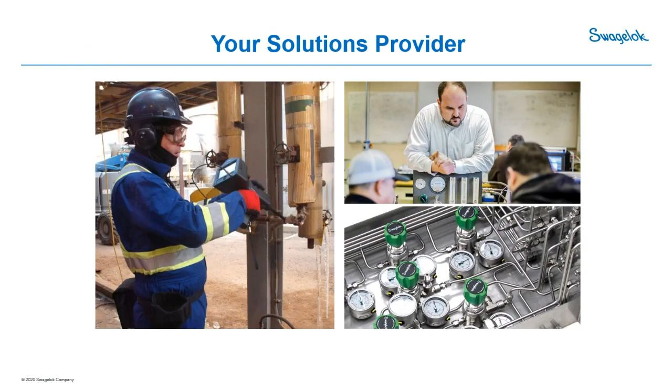Thanks, Tim. So like Tim said, my name is Phil Daniels. I'm a Mechanical Solutions Engineer for the team here at Swagelok Central Ontario, Atlantic Canada. I'm a professional engineer in Ontario, and a bit about my background: I have a Bachelor of Science in Mechanical Engineering with a focus on thermal fluids. I've been with the Swagelok organization for about 6 years now, and really my focus is on technical support, so hose advisory service, pressure regulator selection, includes high pressure systems as well as seal support system configuration.

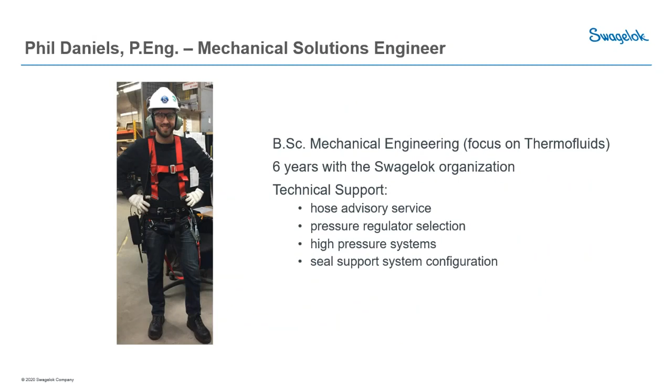But today we're going to focus on tube versus pipe. Today we're going to have Hassan Ghoul, an associate solutions engineer with our group here. A bit of Hassan's background: he has a Bachelor of Engineering Mechanical, and he's been with the Swagelok organization for about 2 years, again with a focus on technical support. This includes fluid mechanics, valve selection, regulator essentials, as well as seal support systems. Hassan will be in the wings to address any questions that you have as we go along here.

Now, like Tim mentioned, the focus of today will be on tube versus pipe. This will include advantages of tube, touch on some thread issues, and then go into some more details on flow, erosion, corrosion in different types of systems. We'll touch on material quality as well as the overall cost when approaching projects.

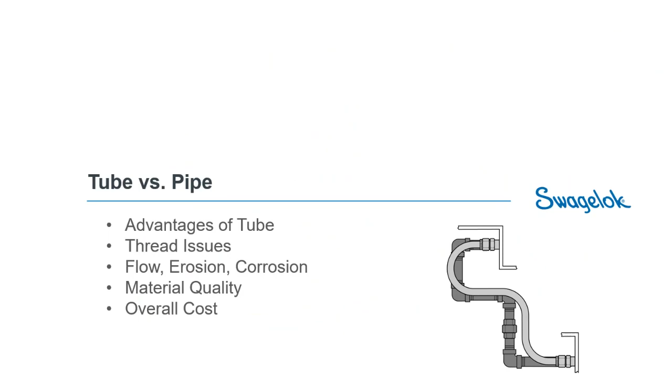Now, jumping in just on an introduction to the Swagelok tube fitting. For those that aren't familiar or haven't worked with it too much, just a bit about how the tube fitting works. It's made up of 4 main components: the nut, the back ferrule, the front ferrule, and the fitting body that you see there. The colors are yellow just to show a highlight on the 4 different components.

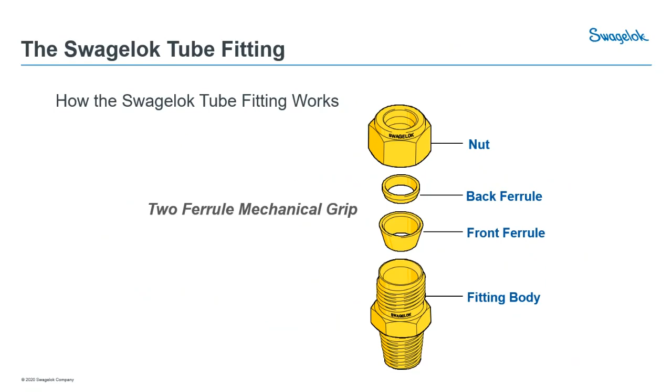On a very basic level, some things to highlight are that there's no special tools required, and there's no rotary motion. All that's required is 1 1/4 turns from finger tight. This is key because the tubing remains perfectly still—there's no rotary motion, and all that's required is the 1 1/4 turn.

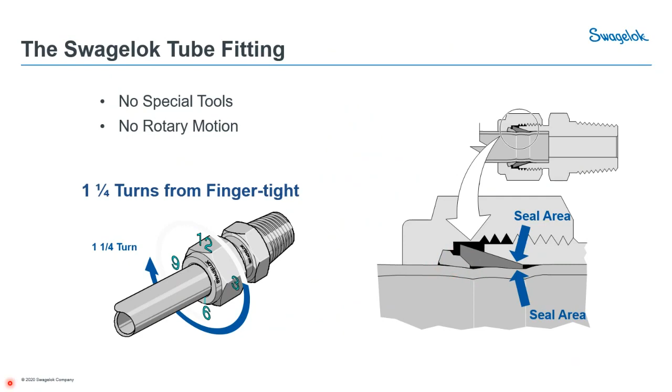Now, if you look at the fitting here, we see a section view. This is on the front ferrule, the longer one, as well as the back ferrule. So really what's being achieved is a long, tight seal area on the front ferrule, and the back ferrule is doing a lot of the work of the gripping as well as the vibration resistance. Now we'll show a short video here just highlighting the simple installation procedure for a tubing system.

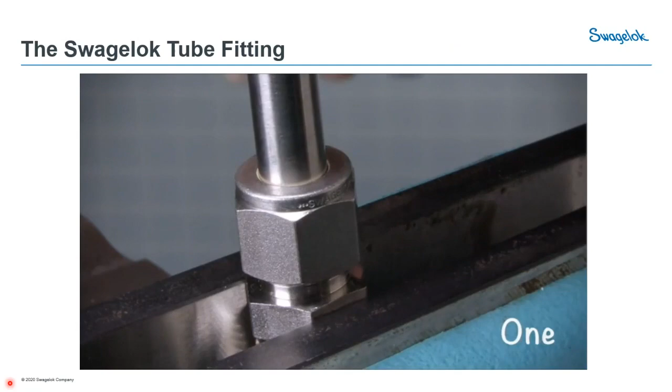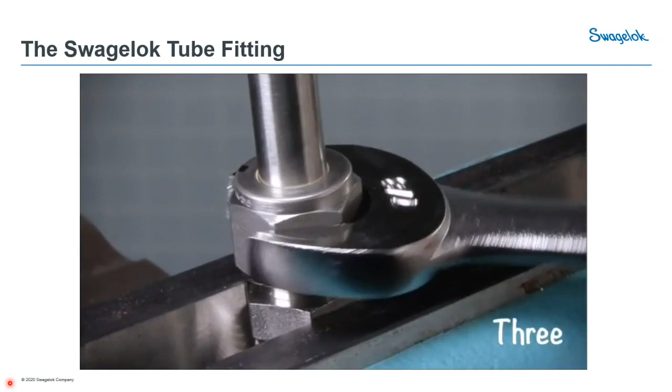Step one is to insert the tubing up against the shoulder of the fitting and ensure the nut is finger tight. Step two, typically we'll mark the nut at the 6 o'clock position. Then as we tighten with a wrench, we'll do 1 1/4 turns, which will end up at the 9 o'clock position. That's it, the job's all done, there's nothing more to it.

So simply when you're looking at the tube fitting, it's a 2-ferrule mechanical grip Swagelok tube fitting. A key thing we'll touch on later is the vibration resistance you get from this. There's no special tools - as you saw in the last video, all you need is a simple wrench to tighten the tube fitting, and there's no additional preparation. So no threading, no taping of threads, no flaring of the tubing, and of course no soldering, brazing, or welding of the system.

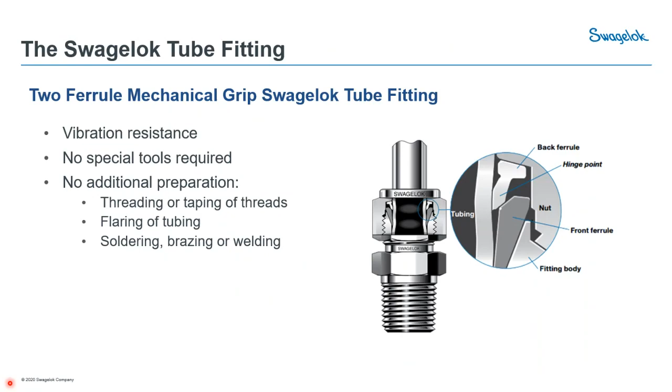Now when we dive into tube fittings, typically you'll look at the tube pressure ratings. A tube fitting is rated to the working pressure of the tubing it's used with. So let's go through an example of the published table. Let's say we have a 1/2-inch system, and let's say you have a 3000 psi system. What you might select is a wall thickness of 0.049. This would result in a working pressure of 3700 psi. There would be a 4-to-1 safety factor on top of this, but the actual working pressure would be 3700 psi in this case.

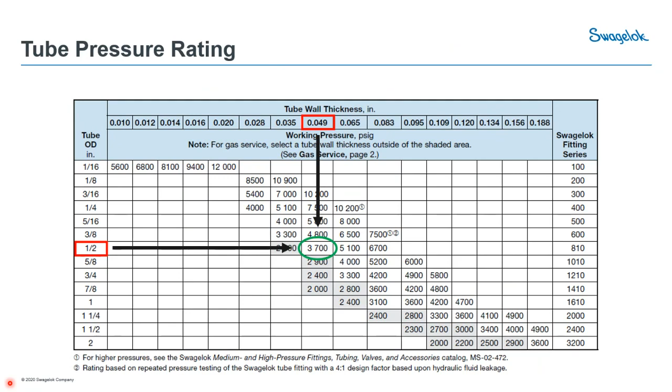Now you'll also notice that there are some shaded cells. There's a few here that are an actual shaded region where the rest are white. If we're looking at a gas application, that's where this becomes something we need to look at.

So let's say, for example, we have 150 psig for an air system. Again, let's focus on 1/2-inch. Now you're thinking 150 psi, you're probably going to be fine with 0.035 wall. That would have a working pressure of about 2600 psi. But what's really required for a gas system is that because gases are small molecules, they can easily get through leak paths in a system compared to a liquid. So what we actually need to do is jump up to that next wall thickness.

And this is outside of the shaded region. The reason for this is that gas systems require that thicker tubing because it creates more resistance to the ferrule and really results in a longer, tighter seal, so you can ensure there's a gas tight seal for your system.

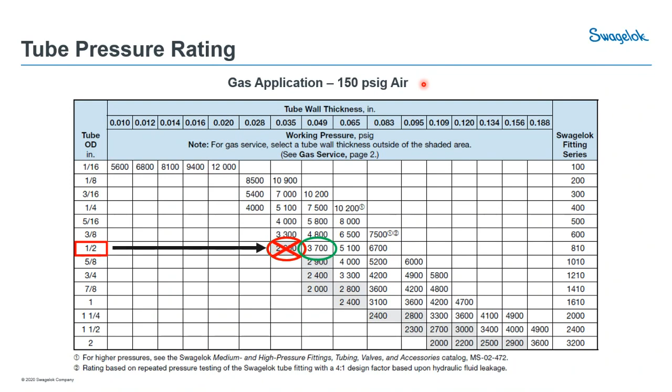Now again, one of the main advantages of tube versus pipe is ease of installation. All that's required are standard wrenches and the job's all done.

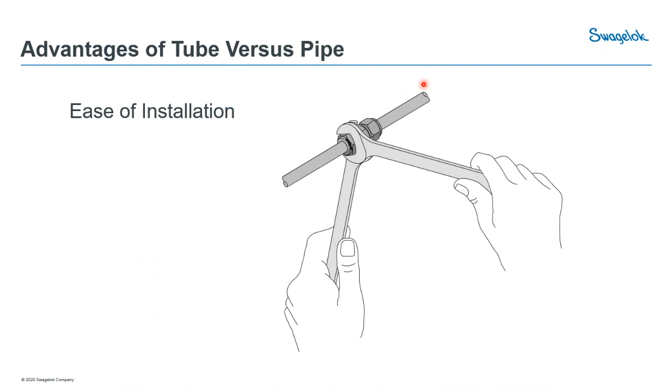Now when we look side by side and touch on some of the advantages of tube versus pipe, one of the primary things to highlight is better strength to weight ratio. When we're looking at a threaded system, typically you'd be looking at maybe schedule 40 or schedule 80 piping - that's really where the strength to weight ratio is a big difference. But when you look at why you have that extra weight, often people think, well, piping is stronger, it must have a higher pressure rating, it's rigid, it's tough, it's robust. But really, tubing from a pressure rating standpoint is equal, if not better, especially on the strength to weight.

So the entire wall thickness of the tube actually contains system pressure. Whereas with a pipe, the reason you have that thickness is primarily so you can cut threads. You have all this extra material just so you can cut the threads. But when you're looking at the working pressure of the system, it's really defined by the thinnest point in the pipe, and that would be the front of the first thread. Now, obviously, if you're looking at welded systems, you may have some thinner wall on schedule 10 or similar sizes, but we'll touch on some welded systems later on.

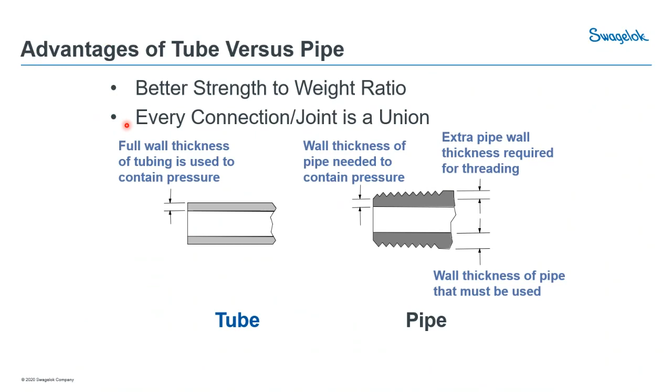Additionally, every connection or every joint is a union - we'll touch on some examples later on. So really, another advantage is fewer connections are required. When you have tubing, you don't have the need to use elbows or introduce additional connections, and each connection is a potential leak point. So when we look at tubing, you have the ability to bend and have that sweeping bend, and you avoid any fittings in this example.

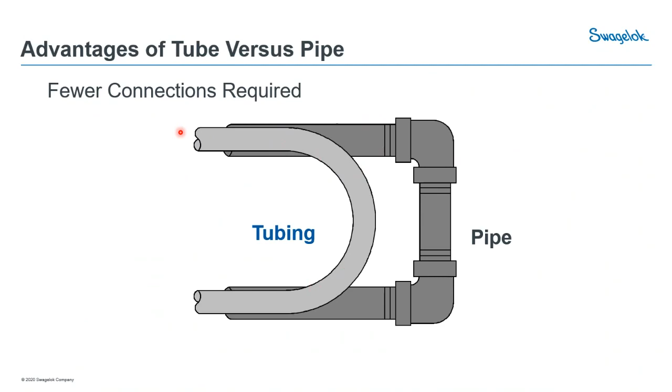Additionally, you're looking at a lower pressure drop. So if you look at this system here, you're having a smoother, more laminar flow, so you have less pressure drops and more flow through your system.

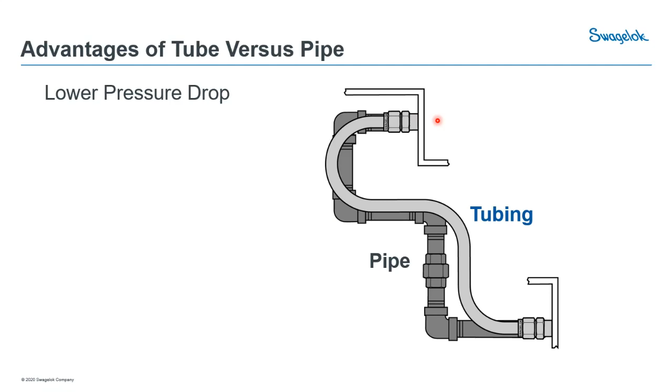Alternatively, you have the sharp corners of the piping system here. And again, looking at the number of fittings or potential leak points, on the tubing system you have one connection here, one here, and one here. So you have about 4 connections on the tubing system. For this piping system, you have a total of 13 connection points. So there's a lot of different things that go into that: leakage, connection points, and even labor that you really save when you're bending in a tubing system.

Now let's take a specific example side by side. If we look at a 1.5 inch pipe versus a Swagelok tube system, in this case it's a higher pressure system, so we're looking at schedule 160 pipe and 2 different sizes of tubing, with wall thicknesses of 0.134 inches and 0.188 inches for the higher pressure system.

So if you look at the wall thickness of the pipe, there's a lot of extra wall thickness - you're at almost 0.3 inches, whereas you're at 0.134 and then 0.188 for the tube wall. Now for pressure ratings, you're close to 3,000 psi for the piping, and you're up to almost 5,000 psi on the heavier wall thickness of the tube.

Now for outside diameter, piping is measured nominally, which means the actual nominal size of 1.5 inches may not be reflected in a dimension on the pipe. So the outside diameter in this case is 1.9 inches. Whereas for tube, it's always a true OD - the outside diameter is always true to the nominal size.

Now if we look at the inside diameters, for the SKED 160 pipe it's about 1.36 inches. The tubing is very similar, at 1.23 and a little bit less on the heavier wall at about 1.12. But here's where it really comes in: when we talk about that strength to weight ratio, you look at the pressure rating around 3,000 psi, and you're getting a weight per foot of almost 5 pounds on the piping. Whereas for the tubing, with pressure ratings of 3,400 and 4,900, you're getting respective weights of about 2 pounds and then about 2.7 pounds.

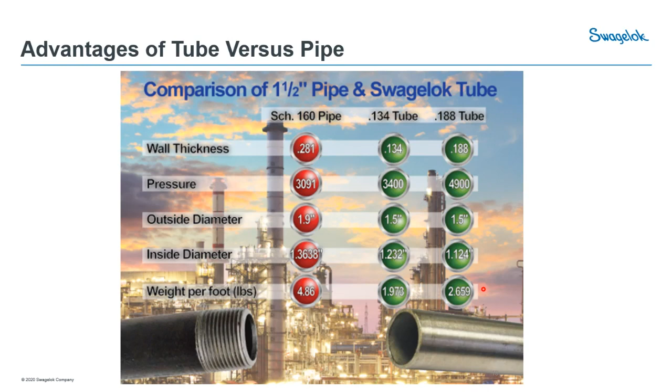Now when we look at the different types, we talked about the tube fitting, and really what goes into the installation, all that's required are simple wrenches. When you look at a threaded system, there's taping of the threads, and when you install a thread, the installation procedure is to install wrench tight. Now there can be variations in that - if I tighten the fitting to you, wrench tight could mean different things. So there's a lot of variations and factors that can come into that.

So there's the threading of the pipe, which we'll touch on, the taping or sealant, as well as the installation. Now further, there's welded options - you can see a socket weld example at the top, and a butt weld example on the bottom. There's a lot more that goes into the welded systems, and we'll touch on that in more detail.

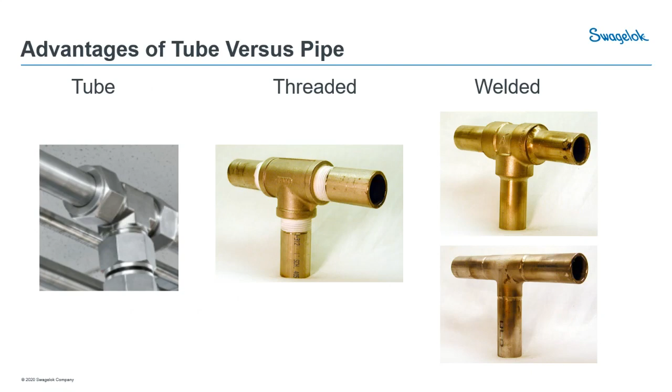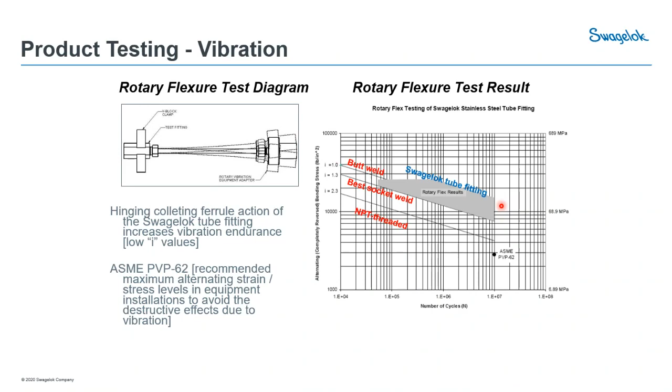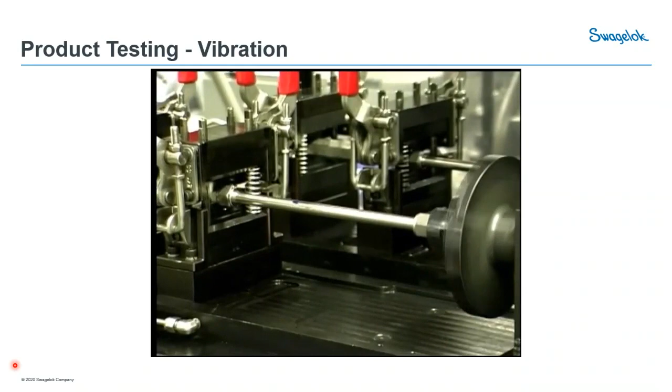Here's an example of what that test looks like. The left side of the tube is fixed, and the right side is attached to a rotating chuck. This is pressurized to 3,000 psi, and it's a rapid test to simulate vibration you might find in the field. This goes over a few days and ends up in millions of cycles of vibration. You can see the tube vibrating back and forth—this is how we analyze how the tube fitting performs under vibration.

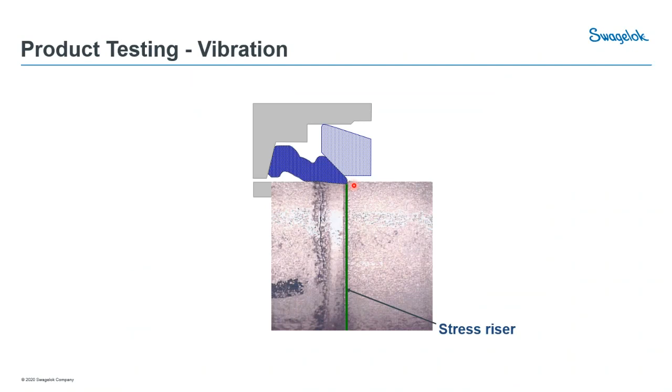But what's really happening when we subject it to millions of cycles and take it to failure—how does it actually fail? If you think about tube fittings, often you'll have a stress riser on the front of the ferrule, with a very small point of contact at the tip, which is where you might expect fracture. But with a Swagelok tube fitting, you actually see fracture further back on the tubing. Why is this? What we've created with the back ferrule is a long region we call the colleting region, where the ferrule is gripping onto the tube. It's really gripping it, especially during vibration, so the force that would normally concentrate on the stress riser is spread across the tubing instead. This allows it to last much longer, especially in vibration service, and that's why you see the resulting tube fracture further along this colleting region.

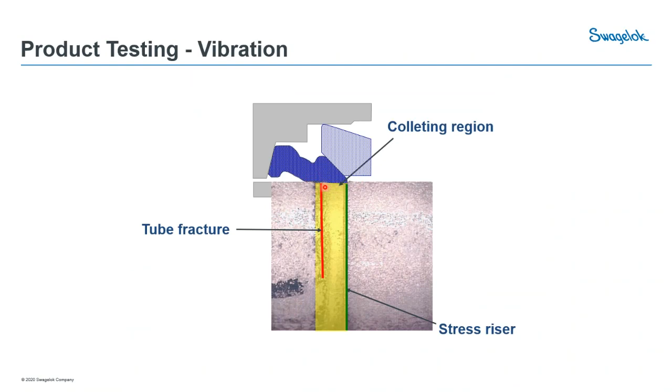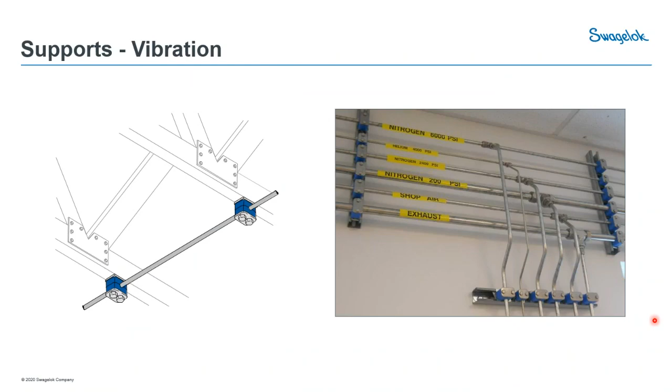Compared to welding specifically, there are a lot of steps you avoid when you go to a tubing system. There are fewer installation steps and less equipment. A big one is the burn permit and fire watch—when you think about installation costs, there are often additional people needed for fire watch, maybe 2 or 3 people just for one fitting or installation. Then there's no X-ray testing on tubing; you avoid purging, passivation, and hazmat disposal. There are a lot of components of a welded system that you can avoid by going to a Swagelok tube fitting.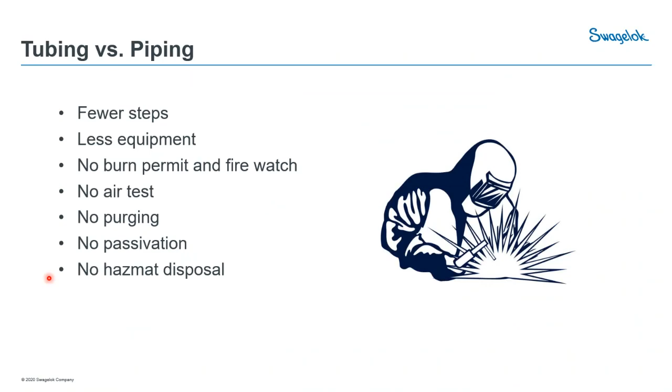There's no hot work, no welding gases, and you avoid weld fumes as well—no shielding needed. On the threaded side of things, there's no cutting oils, fewer metal shavings, which we'll see shortly. And in confined spaces, if we can avoid hot work and welding, all you need are simple tools—no cleanup from oils. It just makes the job a lot simpler and creates simplicity overall, and it's applicable to both ASME B31.1 and B31.3 applications.

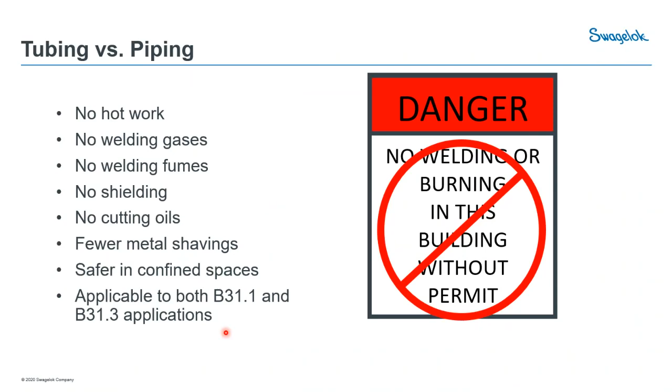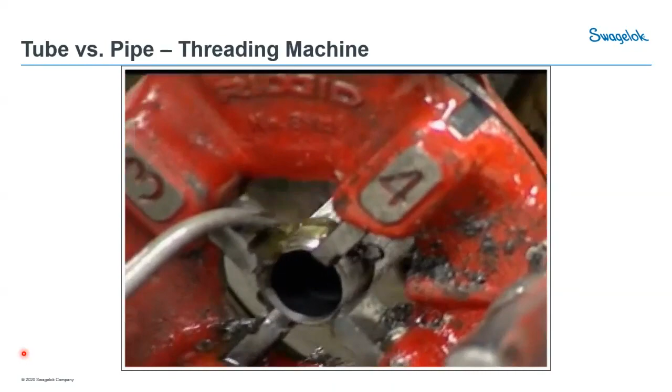Now, if we look at what a typical threading machine looks like, this is really what you're creating: a lot of oil is used, there are shavings, and some oil can get into the pipe itself. It's really about the cleanup of that workspace—you need to account for the cutting oils used and make sure no shavings are left around, especially that none get into the system where they could affect softer components, like a valve seat downstream or a precise instrument.

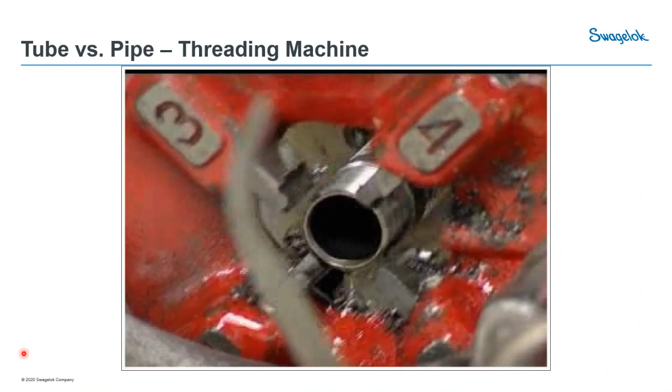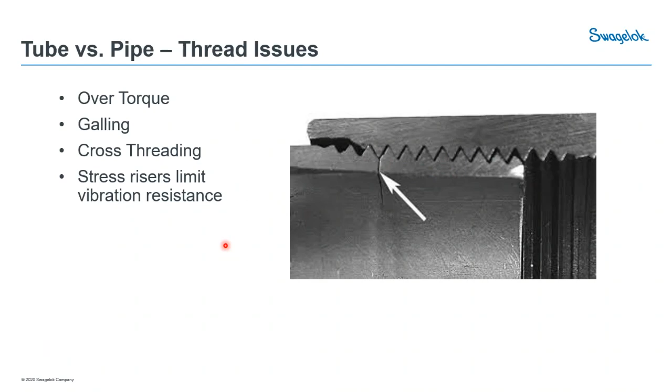Now let's look at a side-by-side example. This one is a condensate booster pump. You can see the traditional piping on the left, which is carbon steel painted piping, and on the right, a stainless steel tubing system. Looking at before versus after, the number of fittings is a big difference: 24 fewer fittings overall, leading to 86 fewer potential leak points on just a small system like this. Part of that is avoiding the use of unions, because every tube fitting can act as a union or joint that can be taken apart for maintenance. You also avoid the cost of additional fitting installation, painting, and everything that comes with that.

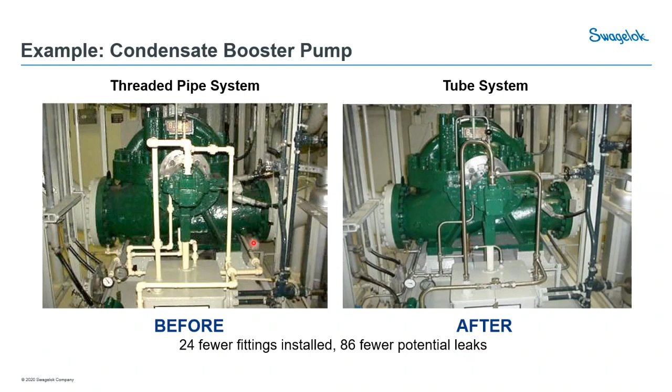Another example here is a pipeline pump, addressing the bearing housing, which is one of the components that often needs to be accessed for maintenance. In the traditional threaded system, anytime the bearing housing needed maintenance, almost all of these fittings would need to be taken apart. That's a lot of work—it would take at least two technicians almost a week just to perform this job. When this was redone in tubing, there are a lot fewer fittings. All that's required to access the bearing housing is to disassemble those two fittings, swing out the tubing, and you can access it as needed.

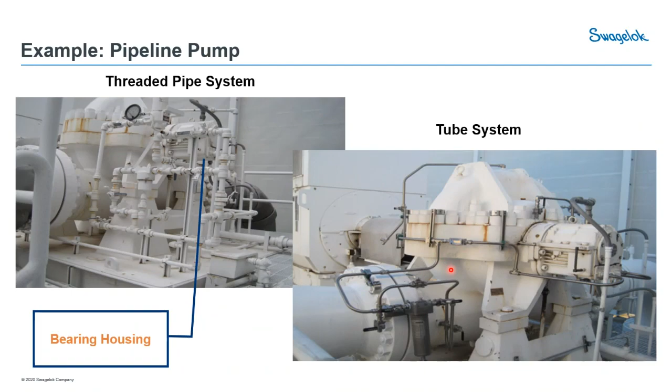Additionally, a change was made. Normally, the threaded piping would be on the side of the pump around the housing. Instead, a lot of the fittings on the tubing system were put closer to the pump, to ensure they vibrated at the same frequencies. When it was beside, you'd have alternating frequencies between the pump and the fittings, causing more severe vibration and leakage issues. Here, we keep them as close to the pump as possible so the frequencies remain similar, resulting in less severe vibration.

So overall, when looking at Swagelok tube and tube fittings, it's an engineered solution. It gives you safety, reliability, and at the end of the day, it's cost effective, especially when you consider the long run.

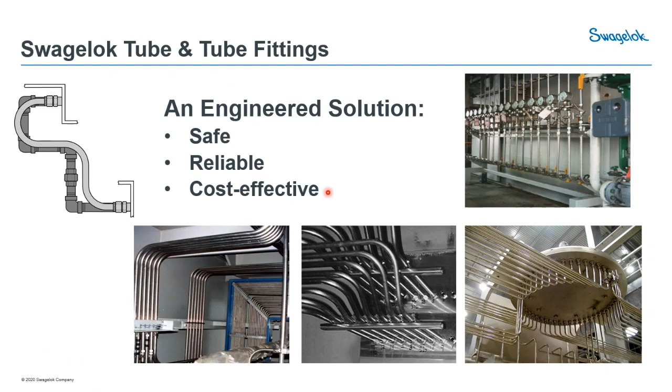Now we're going to pause here for some questions. Hassan, do we have any questions that have come through? Thanks, Phil. Yeah, we have a question from Terry: what size tube fittings do you manufacture? We manufacture tube fittings with imperial sizes of 1/16 to 2 inches, or metric sizes of 2 millimeters to 50 millimeters.

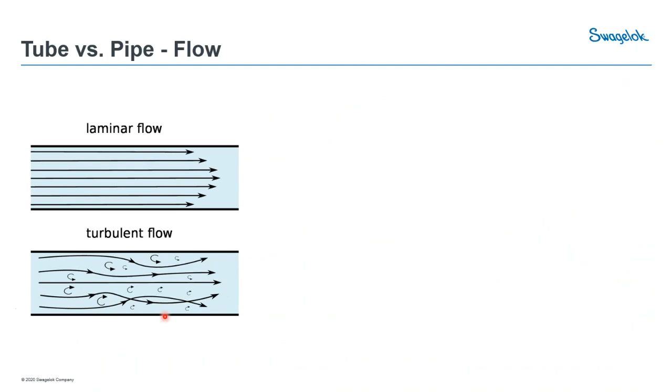That's perfect. Thanks, Hassan. So we're going to move on now into the flow aspect of tube versus pipe. I mentioned when you go to a tubing system, especially with those long sweeping bends, you stick to laminar flow. So what does that mean? When we have laminar flow, it means smooth, sweeping flow—not turbulent, where you have little eddy currents, mixing, and a more mixed type of flow, instead of that smooth flow.

But what does that really mean? If we look at the velocity profile, the actual length of these lines represents the velocity or speed of the fluid. With laminar flow, at the center of the pipe you have much longer lines and achieve a much higher velocity. Whereas with turbulence in the system, you're set to a limit and the velocity can't increase any further. Why does that matter? When you have turbulence, it reduces the velocity, and since velocity is related to flow, you reduce the flow in your system.

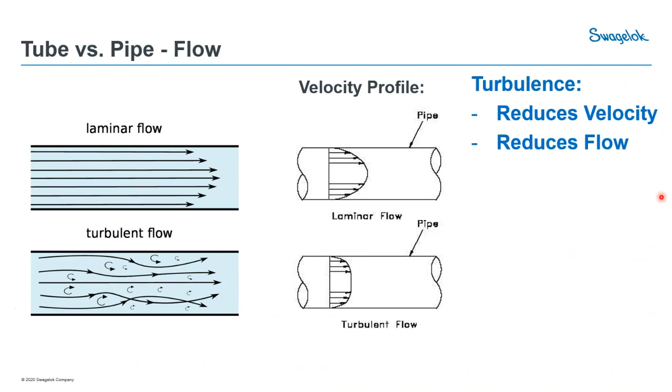Now we're going to talk a bit deeper into the flow side. Bear with me on this slide, and we're going to get to a key point and finding on the next slide. There's something called a Reynolds number, a dimensionless quantity used to help predict flow patterns, such as the transition from laminar to turbulent flow.

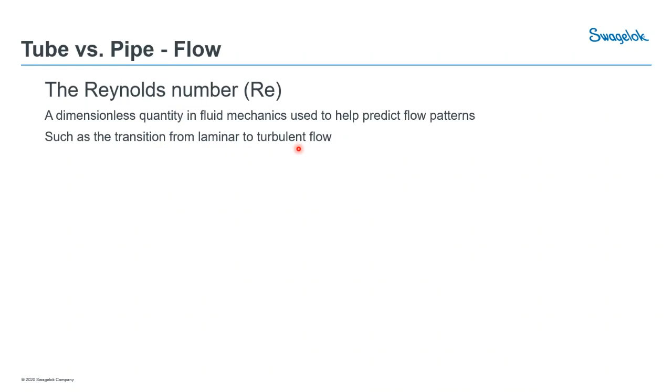Now you could use a variety of formulas. An example here is the Colebrook equation, which we're not going to get into, but there's a variety of factors and components in that equation.

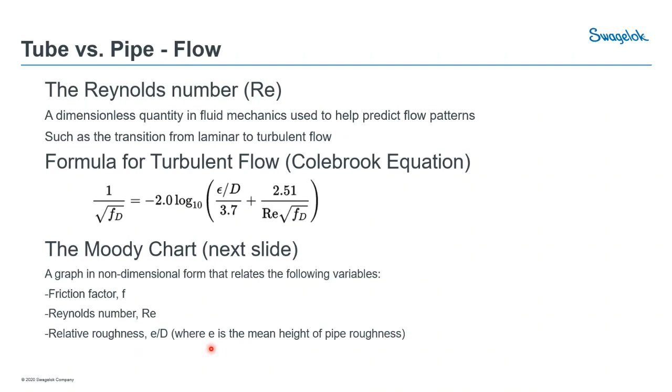On the next slide, we're going to show a Moody chart. Again, it talks about Reynolds number, various factors such as the friction factor and relative roughness. But what we're going to focus on is that E value, the mean height of the pipe roughness. So basically, if you have a smooth versus a rough pipe, that's going to be reflected in this value.

Again, this is a complex graph, but what we want to focus on is the chart on the bottom left. This is where you'll see those various E values. For example, you have something very rough like riveted steel or concrete - you might have an E value, or the height of that roughness, of about 3 millimeters, which is very rough. You go through wood, galvanized iron, all the way up to drawn tubing, which would be similar to stainless steel tubing, and you have a much smaller E value. So those imperfections or the roughness that you see in the material would be much smaller.

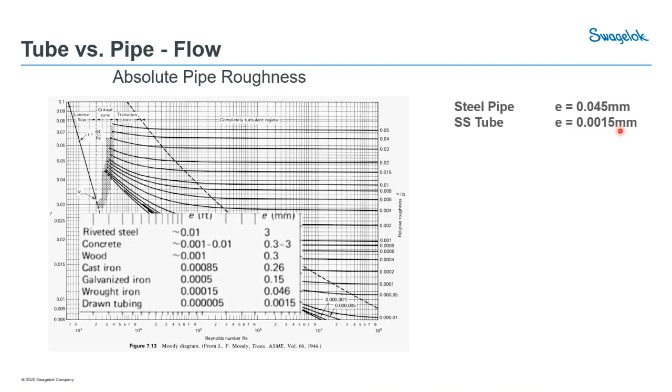So now the point we want to make is when you're looking at steel piping, your typical commercial steel pipe versus a stainless steel tube, there is a measurable difference between those roughnesses. Now this doesn't mean you're going to have the ratio of differences when looking at the smoothness, but the point is that there's a measurable difference when comparing the smoothness of a tube versus the smoothness of a typical commercial pipe.

Further, now let's look at pressure drop. We talked about elbows and how they have an effect on the pressure drop. Now, the way we can show what that really means is by using the equivalent feet method. So let's take an example here.

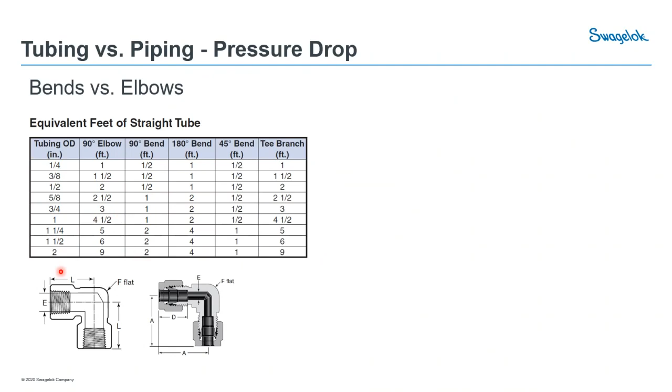So if you think of a system that has dozens or hundreds of elbows, it's the same as adding many hundreds of feet of straight piping or tubing and the pressure drop associated with that. Now if you're looking at elbows, you're still going to achieve the same or similar pressure drop whether it's a piping elbow or a tubing elbow.

So the key is, whenever possible, try to go to that bent tube. You have those long sweeping bends, and you can really avoid a lot of the pressure drop that you would have in the sharp elbows of that piping system.

Really, what's the result? If you have lower pressure drop, you can have reduced hammer or shock depending on the system, and really lower pressure may be required. In many cases, if you have a supply pump for a system that has many feet of piping or tubing, you may have the ability to lower the pressure required from that pump. Maybe you can select a different pump that may have other cost efficiencies for your system.

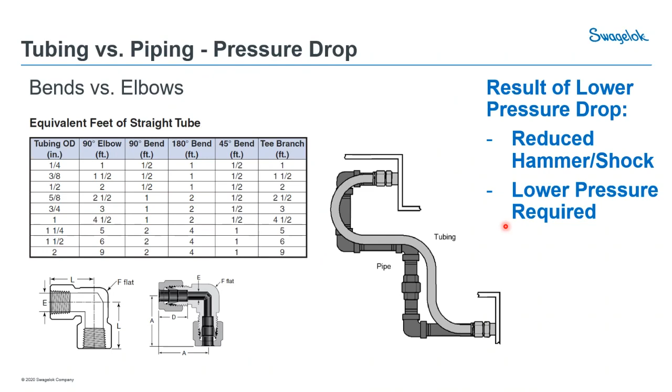Now let's look at another topic here, looking at corrosion and erosion. There's a lot of information here, but we're just going to focus on a few components. This table talks about different variables, and this was taken specifically for boiler feed water. So in this case, each variable has a different effect.

For example, if you have a higher velocity, that's going to increase the erosion or corrosion in your system, and so on as we go through the examples. But what we can focus on and what we can control in this case is the geometry, so tubing sweeping bends versus elbows, for example, as well as the components of chromium and molybdenum.

So we talked a bit about that painted carbon steel system, and we can compare that to stainless steel. What we're saying here is the component geometry creates more turbulence with elbows. That turbulence affects and creates more erosion and more corrosion in the system.

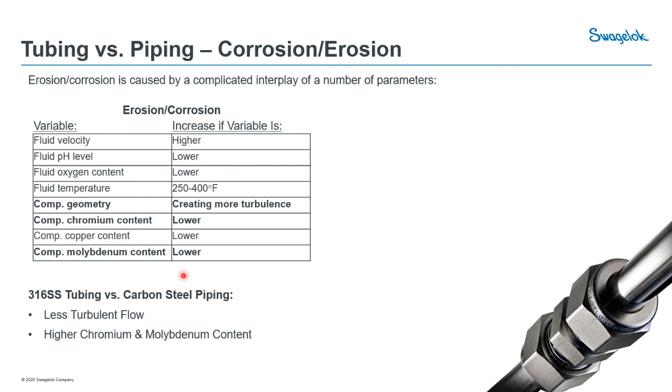And again, if you have lower chromium and lower molybdenum, that's going to increase the erosion and result in more corrosion. So if we look at the typical comparison, if we're looking at 316 tubing, which is most commonly used, versus your traditional carbon steel piping, you have that less turbulent flow, and naturally you have higher chromium and higher molybdenum content.

So overall, if we look at tubing versus traditional piping systems, you're going to achieve a longer service life and really less maintenance. So a lot of the cost savings and the performance you're going to achieve over that longer life, less maintenance, and really just have a better performing system.

We have a question from Omid: wouldn't the bending section be exposed to more pressure and therefore cause failure? In conclusion, bending does not affect the pressure rating of the tubing itself, as long as you're maintaining the adequate bending radius. Based on the pressure burst tests, if you ever had the chance to do one, you actually see that the failure does not happen at the bend. It will happen somewhere else.

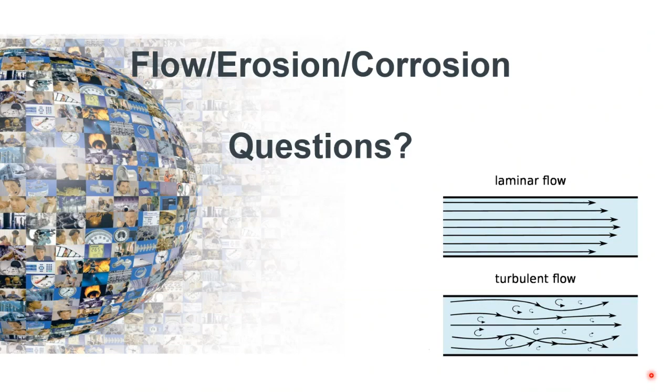So let's move on to the next section here, just touching on a few more topics. When we think about compliance, that's often a question that we see. CRNs, of course, is important in Canada, and for a tubing system, you achieve all of these things: TSSA compliance in Ontario, ASME B31.1, B31.3, ASTM, ISO quality program.

A key thing we always highlight as well is the US Navy. They have the ASTM F1387. Now, this is a very stringent series of tests that has gone through as well. And then other various certificates: CSA, TUV, PED. The point is there's a wide variety of compliance because we understand that that's an important component that may be required for different systems.

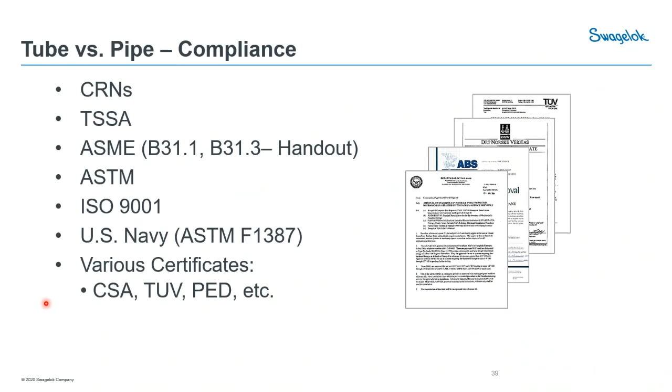Now, another thing is material quality. So we touched on this a little bit when we were talking about erosion and corrosion. But one thing to really highlight is what we've done at Swagelok to take it a next step further.

Now, if you look at 316 stainless steel, most commonly used type of stainless steel, these are the variety of subcomponents of the different alloys. Now, what you'll notice is that for chromium and for nickel, there's actually a range.

So as you might guess, a lot of the common industrial components that you'd find, in order to save costs, they go very close to the low end of those values, which means it's still compliant as 316 stainless steel, but you avoid using expensive nickel and chromium. So you might see 16.1% chromium and close to that 10.1% nickel.

But really, we find that in certain corrosive environments, this has a drastic effect. And there's certain percentages that you really want to hit to ensure that performance. So for all Swagelok tube fittings, we'll have a minimum of 17% chromium and a minimum of 12% nickel. So this still remains compliant to the 316, but it elevates those so that you can ensure that performance.

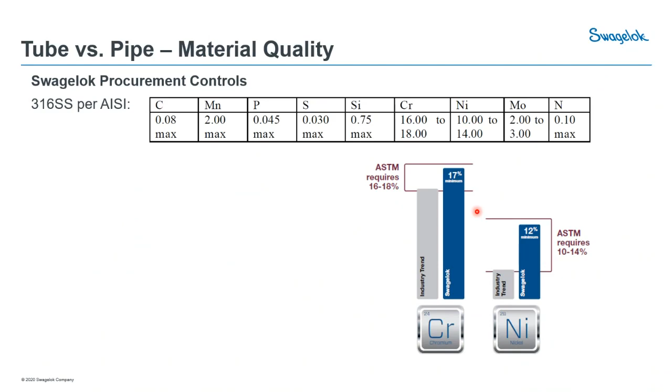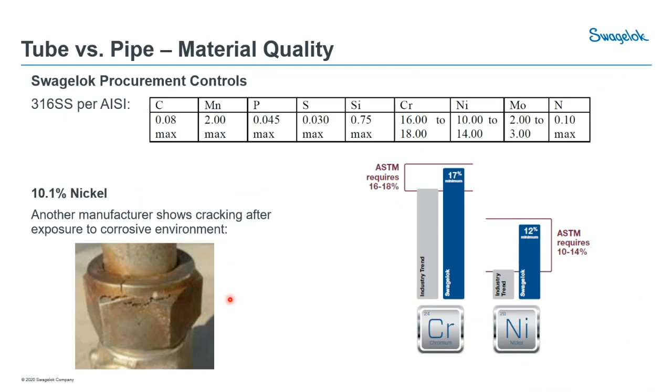So beyond just having those chromium and nickel levels, it all starts with the raw material. We talked about the performance of the fitting itself, but there's a lot that goes into the material and the feedstock into your component. All forgings and bar stocks are used for pressure bearing and pressure retaining components. We do 100% ultrasonic examination, eddy current analysis, and we always do random sampling.

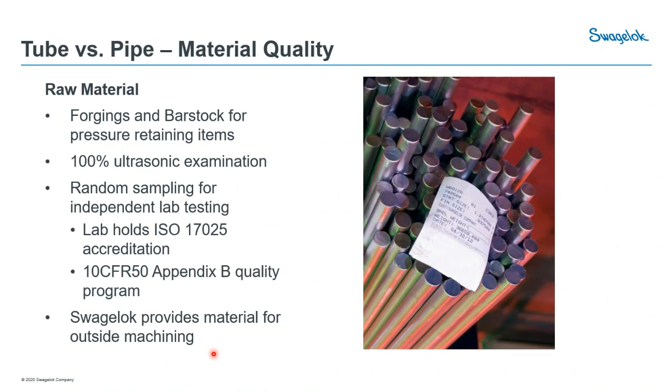We have an independent lab, and our lab holds ISO 17025 accreditation. Many of our components have nuclear requirements as well, like the 10 CFR 50 Appendix B quality program, which really holds our material to a high standard. Beyond that, if we do have any outside machining for components, we provide the material. So controlling and really having a lot of detail and quality in the material supply chain is critical to ensure the performance of components. Now, along with that comes traceability.

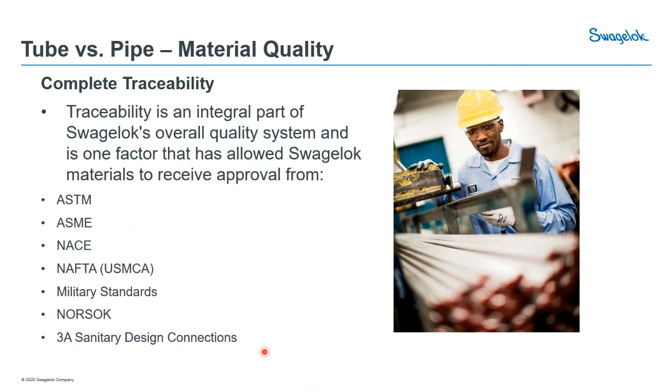Especially when you're looking at nuclear or other industries, there may be PMI testing and really having that integral traceability, whether it's to ASTM, ASME, NACE components, NAFTA, various military standards, NORSOK, and 3A for sanitary applications. So what that all builds into, whether it's the design of the material, it's the limited lifetime warranty. When you have a Swagelok tubing system, you can be sure that all materials will have a limited lifetime warranty on material and workmanship.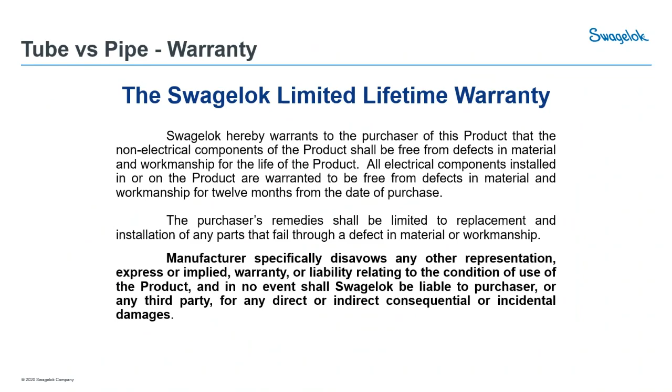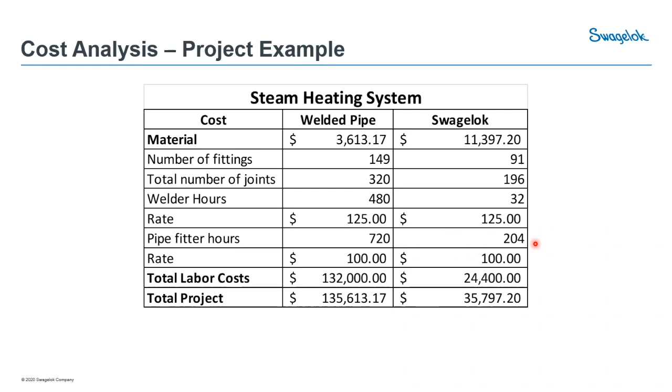So if we look at that side by side, really it's that lower total installed cost. That piping system was about $135,000, including material and labor. The labor was actually 97% of that cost, and the material was only 3% of the total project cost.

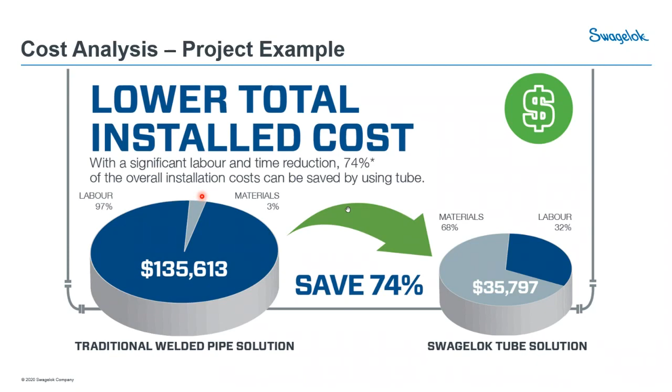So if we look at an example here where we save 74%, the labor was actually 32% of the cost, so the material is two-thirds of your value in the $35,000. So really, not only are you saving money, but you're investing in your system. This two-thirds of the cost is actually being maintained in the system and is going to ensure the performance, whereas in the piping system, you're really only spending 3% on the materials and the quality you're going to have for the long run performance of that application.

So really, when you're comparing side by side, going to a tubing system, you are paying more for the material. But we talked about the material quality and performance you're going to get, and you're getting savings in a variety of ways. You're saving on labor, there are fewer fittings, less consumables and equipment, especially compared to welded systems. There are fewer leaks, not only in the long run but at startup, and less downtime. In the long run, your MRO - maintenance, repair, and operations - costs are going to be lower when you're using that tubing system.

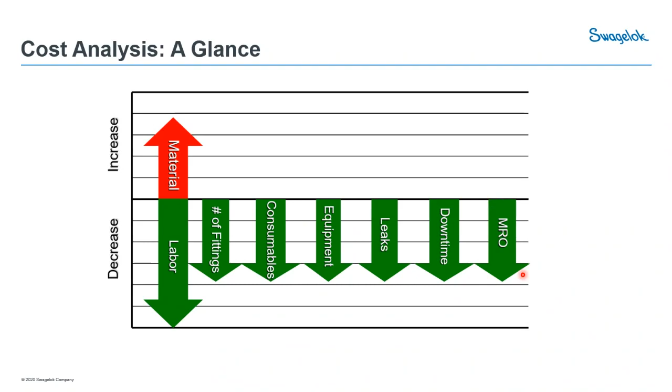Along with the tube fitting, and like Tim mentioned at the beginning, when you look at the Swagelok distributor network—whether locally here in Ontario or Atlantic Canada, or globally with a local distributor—you're going to receive on-site support, technical expertise, engineering services, and support like you've seen today, as well as validation testing and training. So it's that complete project support you receive, not only the quality from the tubing, tube fittings, and other components.

So we'll stop again here for questions. Hassan, do we have any final questions here?

Thanks, Phil. We have two questions that are actually about the previous section, and they're kind of related. The first is from Ajith: what are the types of corrosion avoided in tubing compared to piping? So what Phil touched on when he talked about erosion and corrosion are some factors that are different between tubing and piping, and that could lead to different results if those variables change. Those factors are geometry, the surface roughness itself—it does affect the turbulence, which I'll talk about in a bit—and the chromium and molybdenum content as well. So that affects the corrosion performance, leading to a difference in corrosion performance between tubing and piping.